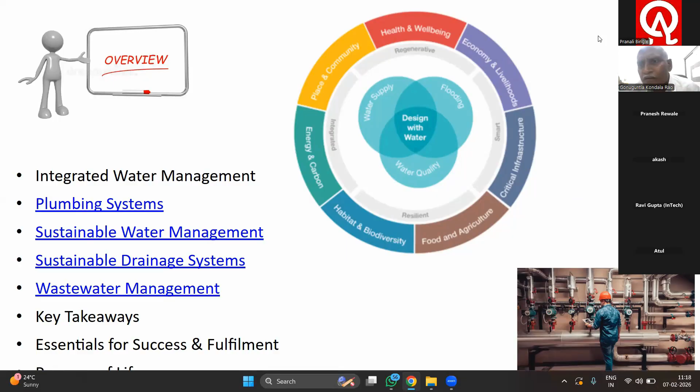Can we close this top panel for a minute - hide it. Madam, can we close this top one, audio, video, participants, etc.? Sorry sir. On the top I am seeing audio, video, participants, chat etc. on the panel - can we close that for a second, at the top?

So you all know regarding the Sustainable Development Goals, which have been developed by the United Nations organization, and which have been accepted in the year 2015 as a continuation of the Millennium Development Goals, which could not be achieved in full. So that is the context.

So the idea is to provide equal opportunities for all, and to have a sustainable planet, and to ensure that poverty, hunger, etc., and inequalities, and access to water and sanitation, and sustainable development, and environmental sustainability, and climate action, and peace and justice, and strong communities, strong institutions, and partnerships for the goals. These are the overall goals. So they are 17 in number. They are supposed to be attained by the year 2030.

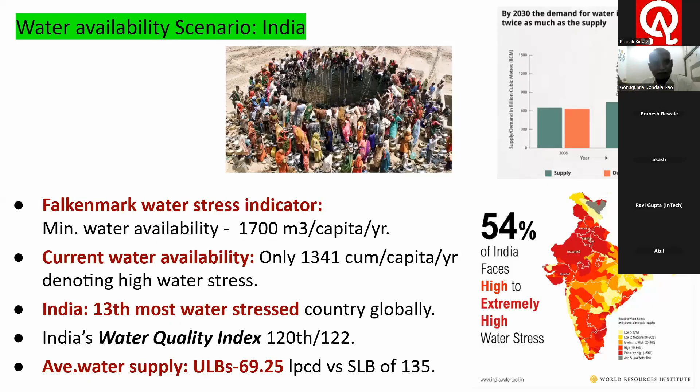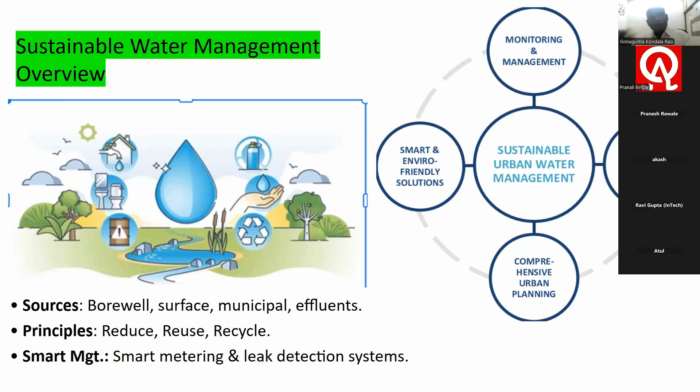So you can see what are the conservation strategies. For example, IGBC, the Indian Green Building Council. For example, in Hyderabad, there is the Sorabji Godrej Green Building. There, you are conserving water, energy, and natural resources, and using natural ventilation and lighting due to sunlight, etc. So in that way, we can make buildings green or positive towards sustainability.

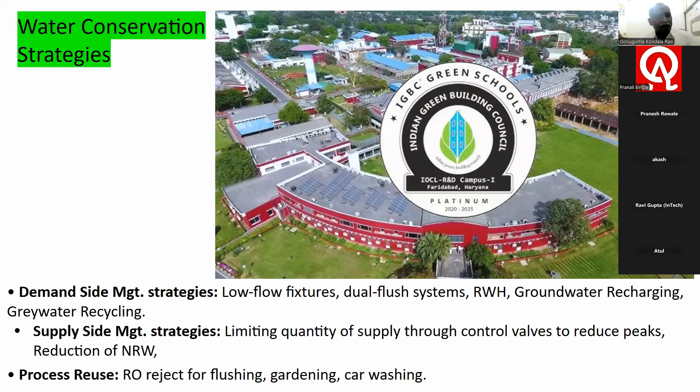So you can have demand management strategies like low flow fixtures or dual flush, groundwater recharging and grey water recycling, and also supply side management strategies like limiting the quantity of supply through control valves in order to reduce the peak flow, and reduction of non-revenue water, which also includes the physical losses. So not only the financial losses, but physical losses also. Process reuse, RO reject water for flushing, gardening, and washing wherever feasible.

So if we see the water loop of Singapore, we have been to Singapore at government expense. I'm thankful to the Government of Andhra Pradesh. What we observed in Singapore is they are importing most of their water requirements from nearby countries like Malaysia and Indonesia, because it is a city state. It is smaller than Hyderabad, and its population is also less than Hyderabad city, that is GHMC, Greater Hyderabad Municipal Corporation. Still, their water management strategies are really worth appreciation.

They are managing the storm water, the rainwater, and also seawater. The storm water is collected in 17 reservoirs. They have made a waterway, so reservoirs are connected. Then the raw water is treated to potable standards. The Public Utilities Board is in charge of the water treatment processes, and that is transmitted to industry and households. The seawater is also treated through desalination and transmitted to industries and households.

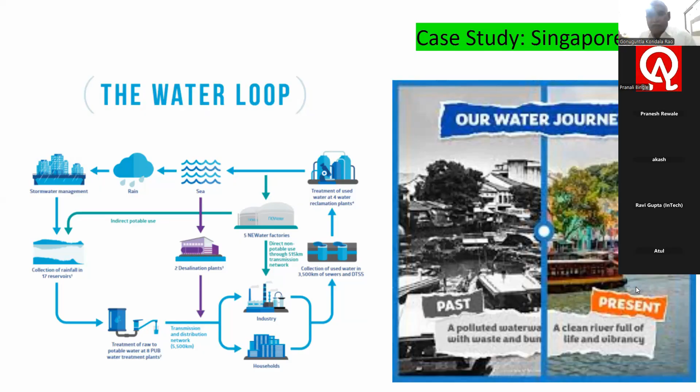In 1977, Lee Kuan Yew, who was the Prime Minister of Singapore, threw a challenge to the engineers and planners: can you clean the Singapore River in 10 years? The officials took up the challenge and cleaned the Singapore River, which earlier was highly polluted, into a pristine pure river. In 10 years, they transformed it into a clean river. We have seen that we can even travel through it by boat, and the water body is very clean, supporting aquatic organisms also.

In Odisha also, another good practice is that they have taken up a scheme called the Drink from Tap mission, and they were successful. They have provided universal access and metering to all households, reduced non-revenue water, and given house service connections. They have also ensured community partnership. As Jal Sathis, they have engaged 5,000 women, paying some nominal amount. They were very helpful in managing the last mile service delivery.

And smart water management, using Internet of Things based systems and sensors, so they can monitor the entire water supply system on a real-time basis through a command and control center. Similarly, they have done infrastructure modernization: water treatment plants, distribution network, GIS mapping, etc. And capacity building also through WATCO, a company they floated, with the Odisha Water Academy, which has helped in enhancing the capacities of the concerned officials.

And public awareness, that is the Pure for Sure campaign. They have also employed a mobile lab on wheels and real-time quality displays. So this is one good practice. They have also built public confidence in the tap water quality. That is what we have to give to the people.

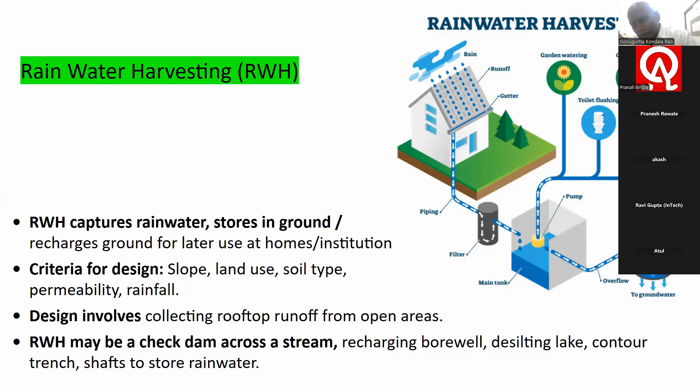And then you can pump it directly for garden watering, etc., or you can pump it to the overhead tank, and from there by gravity you can supply water for toilet flushing, car washing, etc. So this is how it works. The overflow can be taken to the groundwater for groundwater recharge or to a well.

So this is a typical design of a rainwater harvesting structure done by the Hyderabad Metro Water Supply Board. There are different designs depending on the size of the house. This one is more applicable for a smaller house. You will have different layers. About 2.0 meters depth for the rainwater harvesting pit, which will have 40 mm metal at the bottom for about half the depth, then 20 mm metal for about one-fourth of the depth. And on that, there will be coarse sand.

Okay. So the important thing is the operation and maintenance, how you operate it and how you maintain it, because the top layer will be silted up. So you have to remove the silt from time to time. That is the only operation and maintenance needed.

And in order to ensure that the top layer of sand doesn't get disturbed, disturbing the lower ones, you should have some sort of arrangement. The splashing should be arrested. This disturbance should be arrested. So you will have something like concrete at the place where the water falls from the top. Okay. So this is the plan and section.

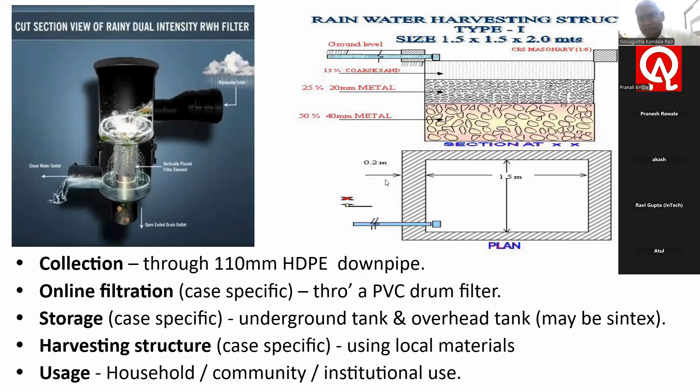So then we come to groundwater recharging. Why is groundwater recharging important? In India, almost 70% of our groundwater is contaminated, and we are facing acute groundwater depletion in most of the areas, even in the Gangetic Plain. That is the unfortunate thing, particularly in Punjab, in urban areas in Punjab, Haryana, Himachal Pradesh, Delhi, Gujarat, etc. Even in Maharashtra, in Karnataka, almost in 70% of the places. That is the gravity of the situation we are in.

So the net reduction in the groundwater table is due to what? Falling rainfall. Over the years, rainfall is falling. Overall rainfall may vary a little this way or that way, but most of the rain which is to fall over a period of about 3 months is falling only in 58 to 62 days. So the number of rainfall days has been coming down over the years, particularly due to climate change, and indiscriminate groundwater extraction, particularly in the Punjab region, etc.

Indiscriminate groundwater extraction. Groundwater recharge is not in consonance with groundwater extraction. Extraction is much more than recharge, which will make the groundwater aquifers completely emptied and not able to cater to the needs. Due to heavily paved roads and spaces, built-up areas, and removal of vegetation, there is no recharge of groundwater, and there is scanty rainfall. All this leads to non-availability or low availability of groundwater, groundwater salinity, unsustainability of the groundwater aquifers, and soil infertility also results.

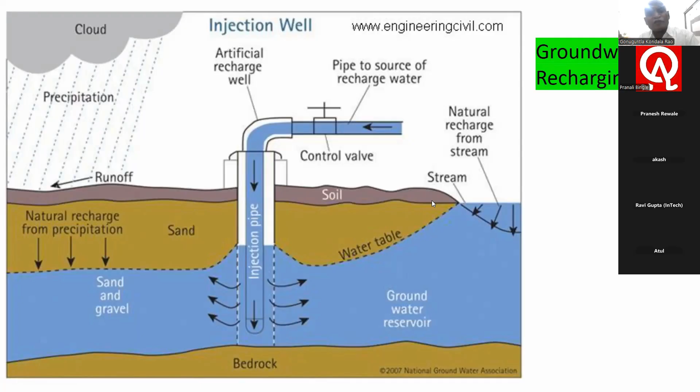So this is how you recharge the groundwater. From the natural source of recharge water, that may be rainfall, a normal rainwater harvesting structure or any other source, you have to pump the water into the ground, into the borewell, through an injection pipe, and it will recharge the groundwater table and the borewell. So this is how it works. This is also a very good option to rejuvenate a dried up well.

So grey water composition. We have discussed rainwater harvesting and groundwater recharging. Now we come to grey water composition. What is the extent of grey water? Almost 62% of the used water is grey water. So what is grey water? It consists of kitchen wastewater, from washing utensils and sinks, the bathroom sinks, the bath water, and the laundry water. All these three components constitute our grey water.

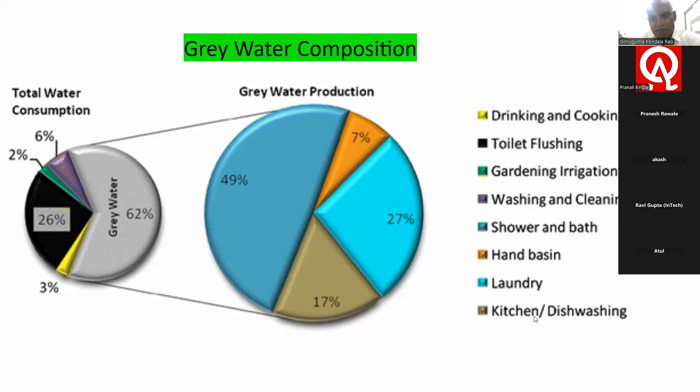Out of the 62% of grey water, about 49%, almost half, we are using for shower and bath. Then wash basins, hand basins, 7%, and laundry, 27%, kitchen, dishwashing. So this is the context in which we will discuss the next thing.

So grey water recycling. The water which is coming from the overhead tank or directly is being consumed by the kitchen, the water purifier, the bathroom and the laundry. This is all what we call grey water, or sullage. All that is collected in a collection chamber. Then it is filtered and treated, preferably through constructed wetlands, because these are nature-based solutions.

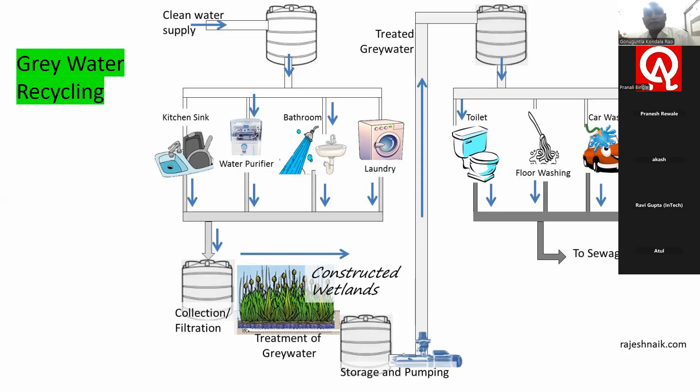After treatment, it is stored and pumped to a separate overhead reservoir, not the regular water tank, and it is supplied by gravity to the toilets for flushing, floor washing, car washing and gardening. There are standards for that also. It's not that it is directly used; we may sometimes need to disinfect it through UV treatment or whatever is feasible.

So these are the standards for grey water. These are the characteristics of grey water. This is the grey water, this is the raw sewage. It's much better than raw sewage, but it still needs some sort of treatment at the domestic level as well as at the industry level or in water treatment.

We went to the Raghavapur water treatment plant under the Mission Bhagiratha scheme for an inspection, in Telangana, near Hyderabad, Parigi Mandal. There is a water treatment plant there, and what they have planned is recycling of the clariflocculator sludge. In that way, they are trying to recycle the clariflocculator sludge water, which is separately collected.

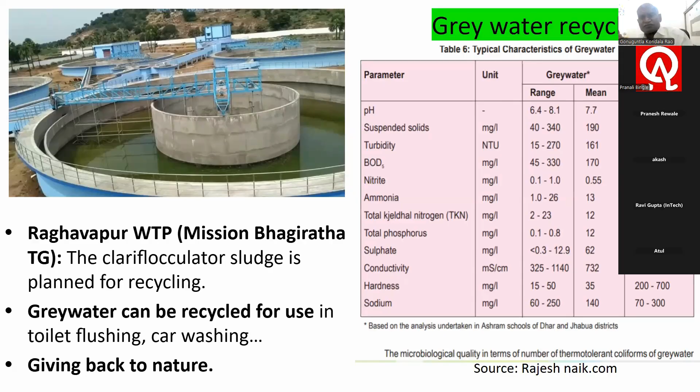So grey water can also be recycled for use in toilet flushing, as we have discussed. What we are doing here is actually giving back to nature. We are giving it back to nature. That is what we have to understand. So another aspect, a little bit more technical. This is the International Water Association.

This is the water audit. This is water balance study. How do you make a water balance study? What is water balance study? What is going into the system? What is coming out of the system? Is it equal, or is there any gap between the water that is flowing into the system and which is coming out of the system? So that is water balance.

So we'll see system input volume. So what is the input volume that is being input into the water supply system? Out of that, there are two components. One is the authorized consumption. The second is the water losses. Authorized consumption is you are authorizing it. It's an authentic consumption. Out of that, there is billed authorized consumption and unbilled authorized consumption. With billed authorized consumption, you are getting money. Unbilled authorized consumption, you are not getting money. In the water losses also, you are not getting any money.

Apparent losses and real losses. Apparent losses means unauthorized consumption and customer metering inaccuracies. Similarly, billed authorized consumption consists of billed metered consumption and billed unmetered consumption. So there may not be a meter, but still it will be billed. That's why it is a revenue one. You are getting money for that. But unbilled authorized consumption does not give you any money. Unbilled metered consumption, unmetered consumption also. Even if it is metered consumption, if you don't bill it, then you don't get any money for that, isn't it?

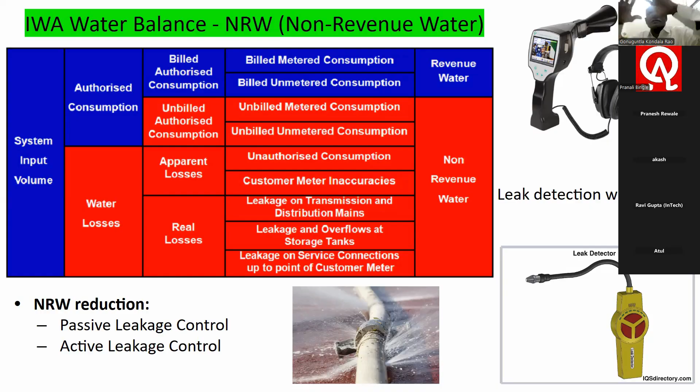Whereas active leakage control is you will investigate. You can use leak detection cameras, leak detectors, leak noise correlators, like that. Some leak detection equipment is there. Through them you will identify leaks, and you will have a detailed plan of action. It needs consultants, a lot of capacity building, and technology and equipment also. So that is a little bit more difficult. That's why at least we should aim at passive leakage control. Whatever is apparent, whatever is visible, you have to first take up the control of that type of leakage.

So life is after all a celebration, my dear friends. So let's take a 1 minute break. I will sing one song, a small song.

सारे जहां से अच्छा हिंदुस्ता हमारा हमारा, सारे जहां से अच्छा हम बुलबुले हैं इसकी, ये गुलसिता हमारा हमारा, सारे जहां से अच्छा हिंदुस्ता हमारा हमारा, सारे जहां से अच्छा.

So our country, we are proud of our country, and we value its rich heritage, and also its water bodies, its resources, its rivers, its canals, its valleys, and its forests, etc. So are we managing them in a responsible way? That is the question we have to ask.

Are we ensuring environmental sustainability, environmental protection, forest protection, river water conservation, and river cleaning up? And are we taking the responsibility? Are we taking the stewardship of water quality and water quantity, water quality protection and water bodies protection? That is the question. Only then can we say our country is great. Sare jahan se acha, we become top in the world.

Oh, 1 minute, 1 minute. One minute. Please wait. One minute. Please wait. Yeah. Sorry for the interruption. So, am I visible? Am I audible? Yes. Am I audible? Yes.

Sorry for the interruption. So, all these parameters are captured by the RTUs and sent to the command and control room where there is a human machine interface. That means human beings will be there and computers will be there. And on the computer, real-time monitoring will be done regarding the water levels, the pressures, etc. Suppose there is a pressure fall at some point of the transmission lines. There we can identify that there may be a leakage at that point, so we can send our linemen and get it repaired immediately.

So that is advanced. Suppose there is an overflow in the reservoir; based on the water level in the reservoir, we can identify whether there is an overflow or not. If there is an overflow, we can immediately give a message to the concerned operator to stop it. And even from the command and control center also, we can control that. So the overflows can be controlled, the leakages can be controlled, and pressure losses can also be controlled.

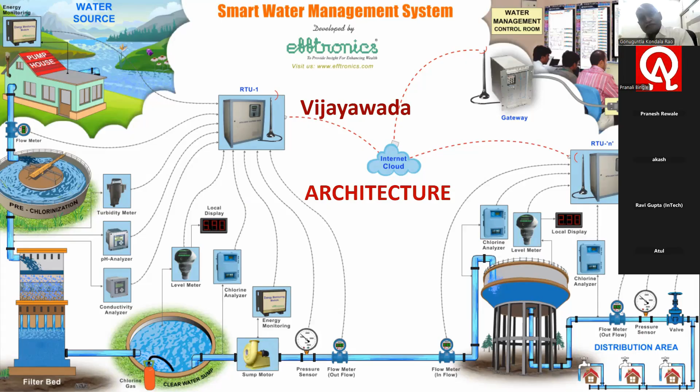So that means real-time, continuous monitoring will help in managing the water supply in a much better way, and even in controlling water pollution and water losses, etc. Okay. And even in emergencies, the SCADA system has helped a lot. You can divert the water supply from one system to another by giving certain interconnections, just for a buffer, for a backup. So that is also the advantage. In the flood in September 2024, it was very useful in diverting water to where water supply had failed. So that is the advantage of this SCADA system.

So there are three circles in Vijayawada. Actually, the MLAs, the members of legislative assemblies, have been demanding, saying our area is not getting water. So we could counter them: no, we have supplied you sufficient quantity of water. This is borne out by the data with us. So then they can be satisfied like that.

So in Tirupati also there is smart water management. That is a little bit different type. There was one 1100 PSC pipeline which was leaking heavily, so the original proposal was to replace the entire pipeline. But later, one IAS officer by name Giridhar was instrumental in engaging the services of one expert from the US. He's an Indian expert, and they devised a software, KY pipe software, for complete continuous monitoring of the pressure levels in the pipelines.

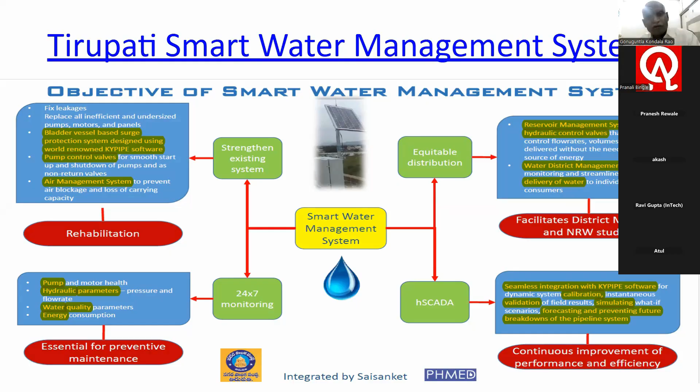These are the various diseases caused by contaminated drinking water, due to organisms like diarrhea, cholera, dysentery, typhoid, polio, and hepatitis A. These are the major diseases, apart from minor diseases.

So what do the Indian standards manuals say? For example, we have the Bureau of Indian Standards, IS 10500, which covers water quality parameters - physical, chemical, bacteriological, and virological.

Similarly, IS 2065 covers building water supply standards, and IS 1742 covers building drainage standards. We also have the National Building Code, revised in 2016, where Part 9 talks about plumbing, water supply, drainage systems, etc. Similarly, we have CPHEEO, the Central Public Health and Environmental Engineering Organization.

There is a water supply manual, and also another manual - the water supply O&M manual, the operation and maintenance manual. You also have the CPHEEO drainage and sewerage manual, published in 2013. And you have the CPCB, the Central Pollution Control Board, and the Ministry of Environment, Forest and Climate Change, with water supply norms and pollution norms.

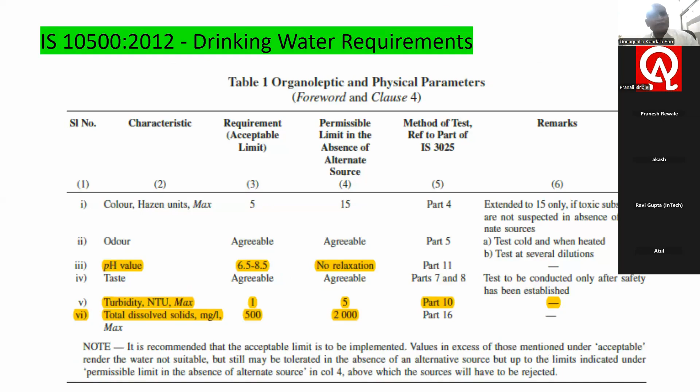So you have a lot of standards, and they are being continuously updated and revised. For instance, IS 10500 covers organoleptic and physical parameters, chemical parameters, and bacteriological and virological parameters.

What are the major pollutants to be measured in water supply, particularly wastewater? There's the oxygen demand - BOD, the biochemical oxygen demand, which indicates the extent of organic pollution in the water. Similarly, COD, the chemical oxygen demand, also indicates organic and inorganic pollution in the wastewater.

Then there are nutrients, particularly nitrogen and phosphorus, because they lead to eutrophication of lakes, etc. We also have indicator organisms like bacteria - fecal coliforms, fecal specific, and Escherichia coli - which indicate the extent of fecal pollution, meaning excreta-related pollution. These are specific to humans.

Solids content, total suspended solids, is also monitored. Nowadays, forever chemicals, persistent organic chemicals, pesticides, insecticides, and their residues are also areas of concern - the PFAS, per- and polyfluoroalkyl substances, which are being monitored in the United States by the EPA. We don't have standards regarding that yet; we have to develop them.

This is surface runoff, showing how pollution happens from domestic wastewater, industrial wastewater, and agricultural wastewater. All these wastewaters contribute to water pollution.

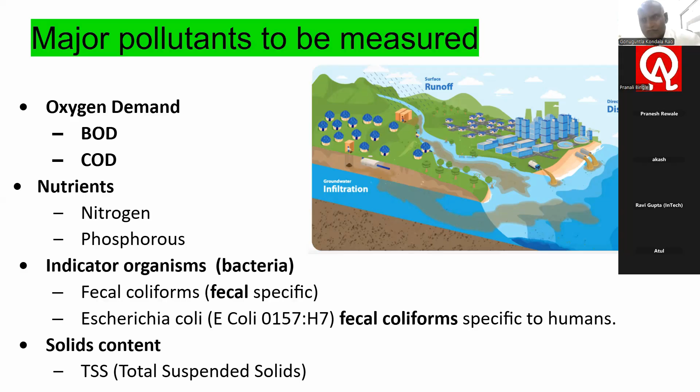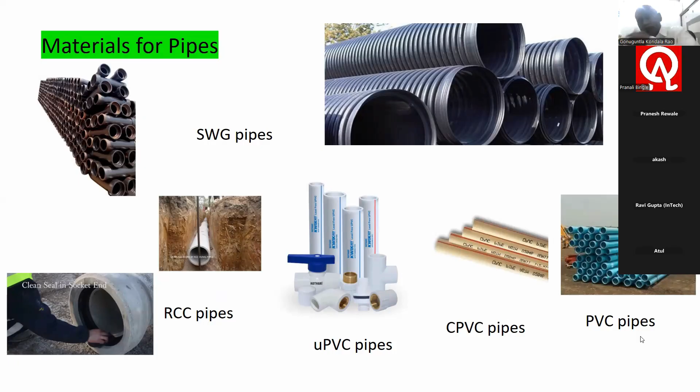These are the pipe materials. These are DWC pipes, also HDPE pipes - double wall corrugated pipes - and these are SWG pipes, stoneware glazed pipes. Similarly, RCC pipes, UPVC pipes, CPVC pipes - particularly used for internal water supply. UPVC pipes are also used for water supply pipelines, while PVC pipes are normally used outside.

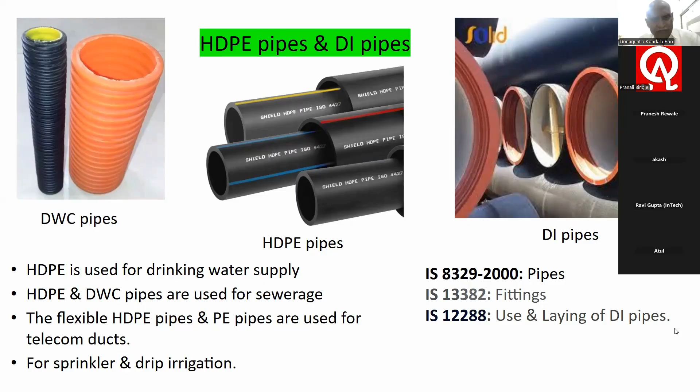HDPE pipes are a good material which we used in our APUSP, the Andhra Pradesh Urban Services for the Poor, a DFID British government aided project, along with DI pipes. These are mostly used for water supply and even sewerage systems - double wall corrugated pipes, HDPE pipes, and DI pipes. We have different codes for each of these.

So plumbing systems. How do you design for plumbing systems?

Nowadays, due to water scarcity, we have to go for extensive saving and conservation of water. You can have water efficient washing machines, like front loading washing machines, which conserve a lot of water. For showers, you can have low flow shower heads, saving easily 30% of water. Similarly, for taps, you can have quarter turn or half turn taps with flow restrictors, saving almost 50% of water.

Similarly, you can have adapters fixed to the taps, saving easily about 50% of water. By using a simple mug instead of flowing water from an open tap, you can save more than 60 to 70% of water. So there are two types of plumbing systems: direct water supply system and indirect water supply system.

What is the difference? In a direct water supply system, you directly pump water. If the pressure is adequate, it will be directly pumped. If the pressure is not adequate, you put a pump and an overhead tank, and through the overhead tank, by gravity, you supply to the various installations, equipment or appliances. So you can have direct, overhead, or pressurized systems.

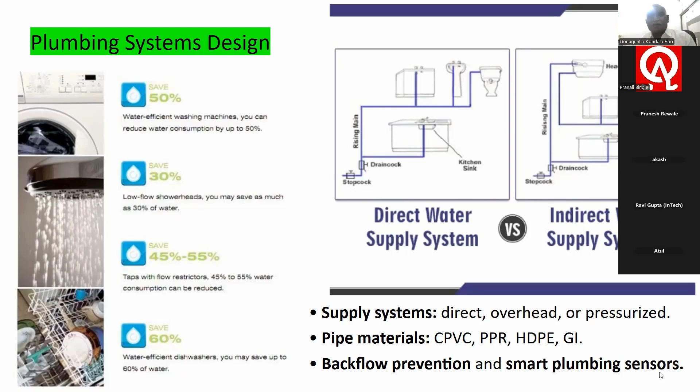You can have different types of materials for pumps and pipes, and backflow prevention and smart plumbing sensors are important. You have to prevent backflow, siphonage, etc., so that there is no contamination of water.

So fixture traps - there are different types of fixture traps. What is the use of these fixture traps? They prevent the mosquito menace, cockroaches, and gases. They also prevent germ entry and sewer gas, etc.

You have to provide air circulation for the drainage system to function properly, so foul air exhaust is also important for the vent terminal. All vent pipes should be provided with a cowl on top, so that there is no entry of mosquitoes, etc. In the diagram, you can see the water seal.

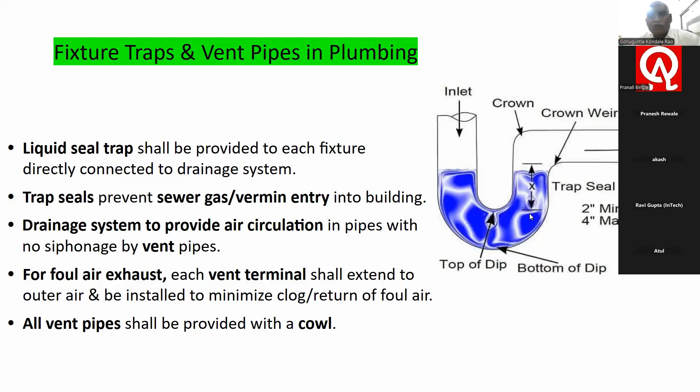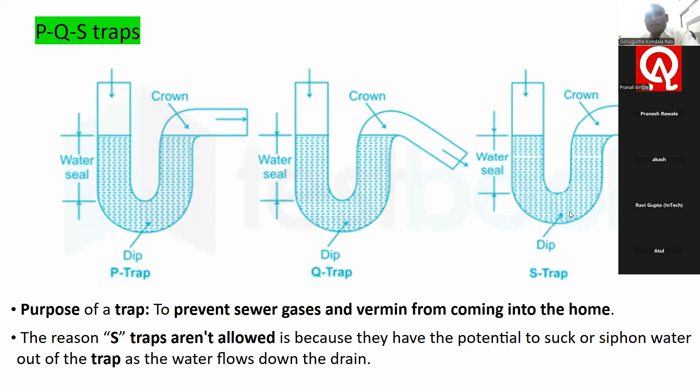This is what is known as the trap seal or water seal. It should be about 2 inches, up to 2 to 4 inches maximum. These are the different types of traps: P, Q, S traps. P traps are used mostly for wall fixing, and Q traps for floor fixing. S trap is not generally advisable because it leads to back siphonage.

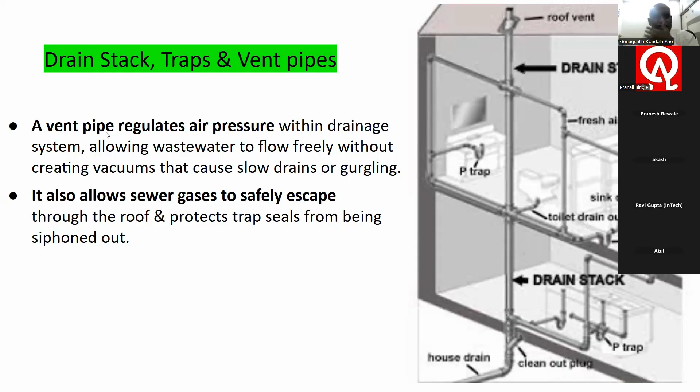And fresh air inlet - it enables fresh air inlets. For clean out, there's a first covering, which is connected to the house drain. What does the vent pipe do? It regulates the air pressure within the drainage system, and it also allows sewer gases to escape.

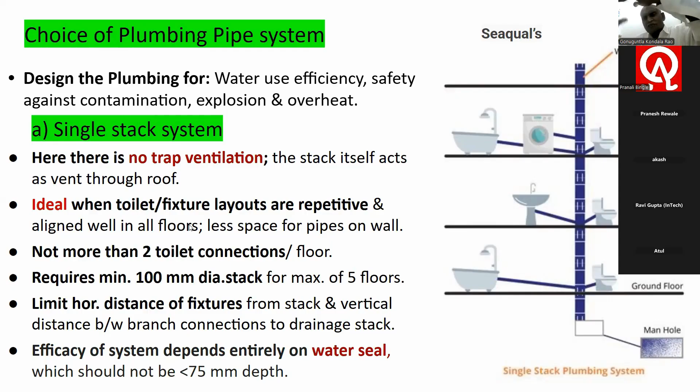How do you identify the choices for the plumbing pipe system? One is the single stack system, which is the cheapest and simplest, with no vent pipe. There is a single waste and soil pipe, and no trap ventilation. It is ideal when the toilet or fixture layouts are repetitive, meaning at the same location on different floors.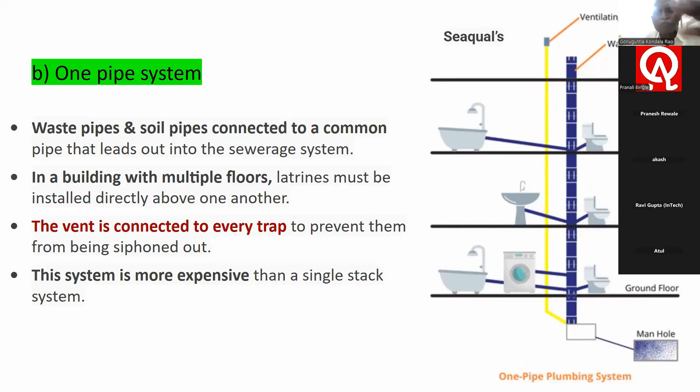This is another system, the one pipe system, where there is a ventilating pipe. All traps are connected to the stack pipe - the waste and soil stack pipe - and ventilation is done through the ventilating pipe. The vent is connected to every trap to prevent them from being siphoned out. This is a little more expensive than the single stack system.

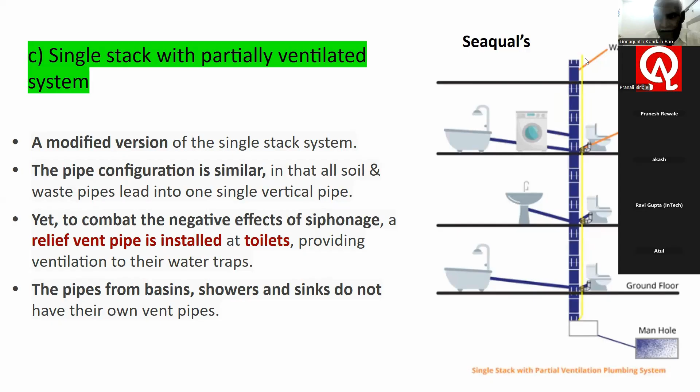This is another system, the single stack with partially ventilated system, where generally a relief vent pipe is installed. These are the relief vents. This is how air outlet happens from the vent pipe, so that gases and vermin are prevented. Another pipe system is also there.

The two pipe system - here there are two pipes, a soil pipe and a waste pipe. The soil pipe is for excreta, and the waste pipe is for other wastewater. Each pipe is connected to different ventilating pipes.

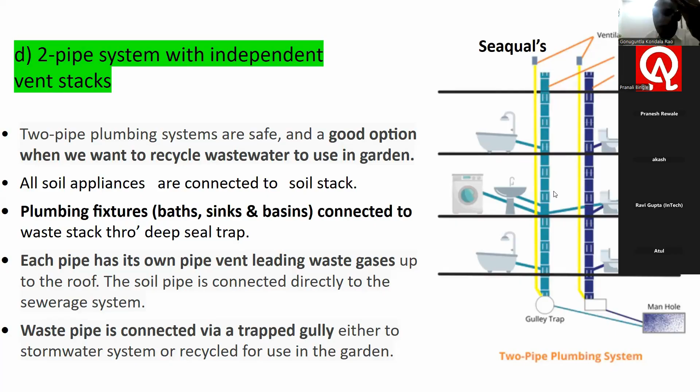This is more costly, so all the plumbing fixtures will be connected to the waste stack through a deep seal trap. That is a water seal, so that it prevents gases and back siphonage. This is a two pipe system with a common vent stack, soil pipe and waste pipe, and a common vent. So this is how it works. All the soil appliances will be connected to the soil stack.

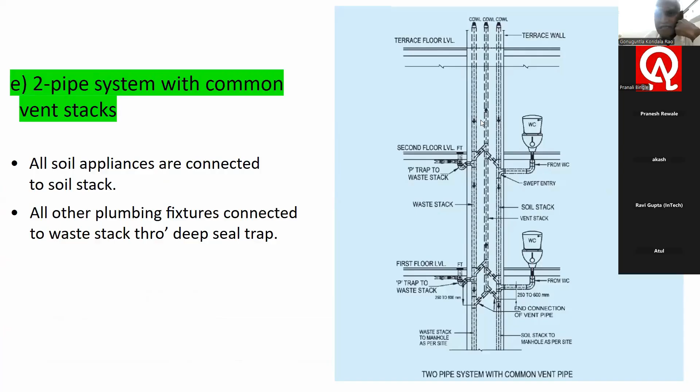So friends, any questions, please? Any questions? Okay, if there is no question, life is after all a celebration.

We will celebrate with a song. This is one song from the film Madhumati, which is a very old song, where the main man, the hero, sings a song.

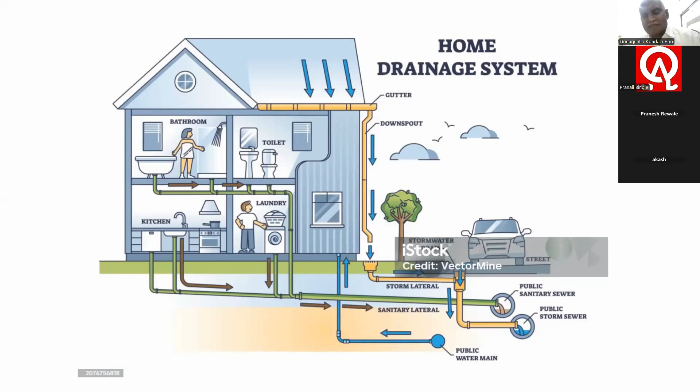So this is the water main, of course, and this is the stormwater lateral. There is a separate stormwater system. In India, because rainfall is concentrated within 3 months, and that too within about 70 days, or less, we cannot go for a combined sewer system. Our system is a separate sewer system because of the seasonal rainfall, unlike European countries.

So how do you manage stormwater? Are we using stormwater in a responsible, environment friendly way? This is the question. So we are going for hard infrastructure, that is grey infrastructure, but is it producing results?

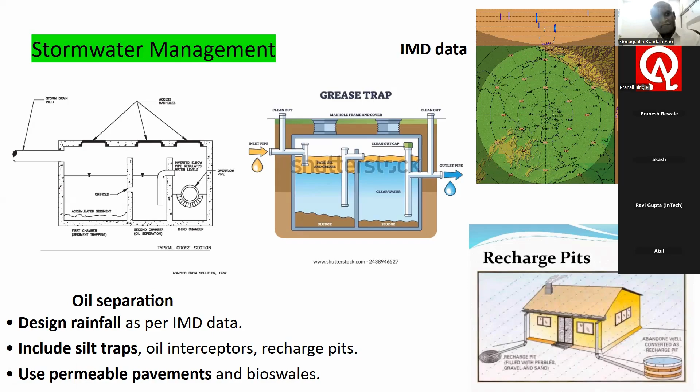And by using permeable pavements and bioswales, that means plant-based swales, that is kacha drains also, you can enable infiltration of the stormwater or runoff into the ground, so that you can reduce the stormwater runoff over the ground. So these are the options for sustainable urban drainage system.

Different people call it differently. For example, water sensitive urban design. Similarly, blue-green infrastructure, low impact development. Like that, different people or different countries are calling it in different ways, but almost all are overlapping.

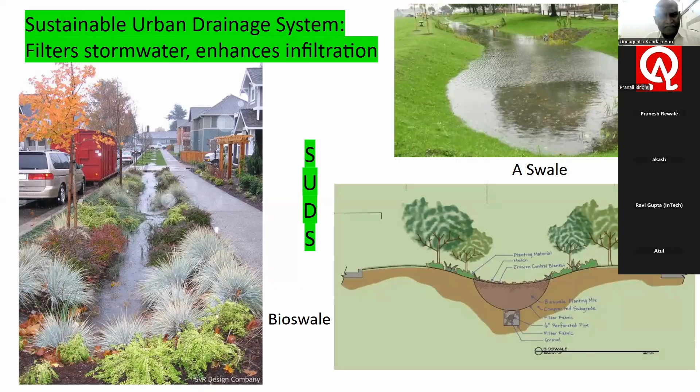So this is one bioswale. So this is one swale. Here there is vegetation. Here there is no vegetation. So there are green gardens. There is a specific design pattern. Nowadays, even GHMC has called a tender where they have specified blue-green infrastructure or water sensitive urban design in their tender for developing this stormwater drainage study.

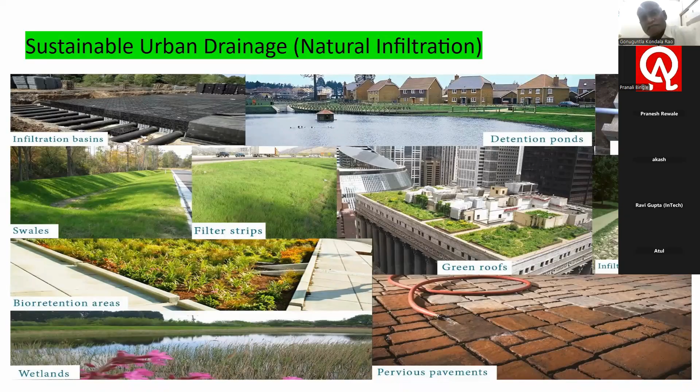So these are different types of blue-green infrastructure or sustainable urban drainage. They are also called nature-based solutions. They enable natural infiltration into the ground. So this is the green stormwater infrastructure, which we have already discussed. This is the conventional sewerage. This is hard infrastructure. This is green and blue infrastructure.

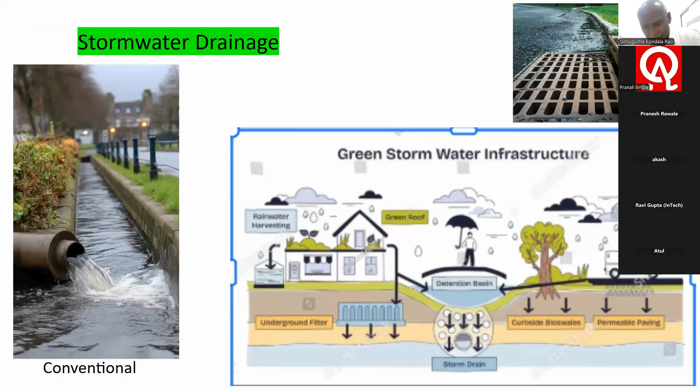Detention basins. Retention basin means it retains water. Detention basin means it retains water for some time only, then it will be let off or pumped. So you reduce the peak flow in that way. This is the curbside bioswales, permeable pavements. In Hyderabad also, in one sports stadium, Cardigan Stadium, they have built pervious pavements.

Wastewater management. Wastewater is the used water. That is grey water, or sewage water, the toilet water, that is black water. Both grey water and black water constitute the sewage or wastewater. This is the industrial wastewater, and segregate the domestic and industrial wastewater.

Generally, in our wastewater treatment, we segregate the industrial wastewater. We don't mix the industrial wastewater and the domestic wastewater. We have separate industrial wastewater treatment plants, either for an individual industry, if it is a big one, or CETP, that is common effluent treatment plants for a group of industries, so that the costs come down and their bottom lines can be sustained.

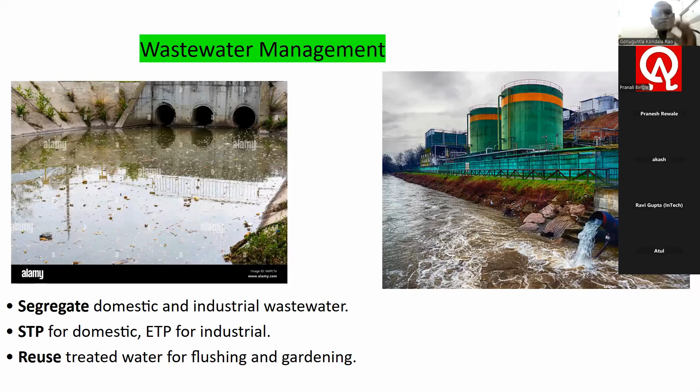Then STP, sewage treatment plant for domestic wastewater, ETP, effluent treatment plant for industrial, and reuse also. Even for domestic wastewater treatment systems, STPs, we can reuse the wastewater for different purposes, or recycle it for industries, agriculture, or horticulture. That's how we ensure circularity. That means we don't waste anything at any stage. That's the circularity principle.

Typical domestic septic tank system. This is the septic tank cross section: the solids, that is the sludge, the liquid sewage, and the scum, which consists of fats, etc., which collect at the top. There will be an inlet obstruction and an outlet obstruction also, so that there is no short circuiting.

You could call them barriers. Household wastewater, both grey and black water, will flow into the septic tank, and it will be collected in a distribution box, and from there it is distributed in the drain field trenches. They are shallow trenches, about 1.5 to 2 feet depth, with perforations. They may be PVC pipes or stoneware glazed pipes.

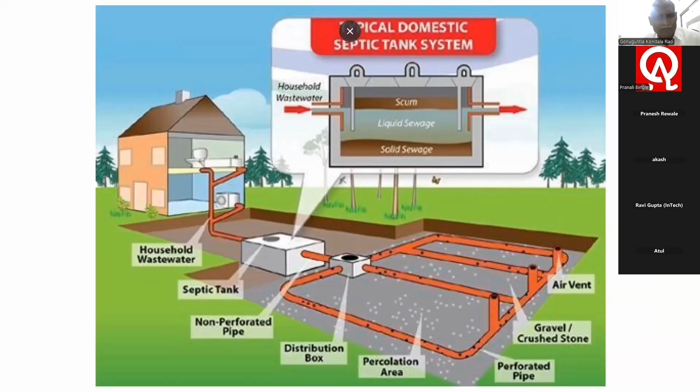And here nitrification also happens. So the effluent from the septic tank is only partially treated. It's only primary treatment. The secondary treatment will be done through this one. You can also have a leach pit. So this is the regular systematic wastewater treatment.

This is the wastewater treatment plant layout, where initially the sewage from the houses will be collected through a sewerage pipe network, and there will be coarse screens and fine screens, and then the grit and waste material will be disposed separately. After the coarse screening and fine screening, it will go to the primary sedimentation tank. The sludge which is collected will go to the sludge processing units, and the effluent of the primary sedimentation tank or primary clarifier will go to the aeration tank.

This is the main bioreactor. From there, after digestion, the mixed liquor will go to the final settling tanks. A portion of the mixed liquor, or recirculated sludge, will go to the aeration tank, so that it will improve the efficiency of the bioreactor. The excess sludge will also be taken to the sludge processing units. After the final settling tanks, the effluent will be taken as recycled wastewater class B and C. That's a little bit lower quality.

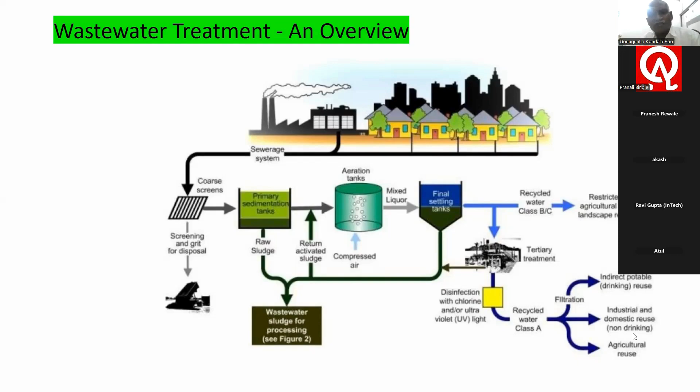Some of the portion will be subjected to tertiary treatment, and then it will be disinfected, and it is called recycled wastewater class A. That can be used for indirect potable drinking water use, and downstream it will be treated. It can also be used for industrial and domestic reuse, but not for drinking unless it is highly purified using RO process, etc. It can also be used for agricultural reuse. So this is a bird's eye view of how the wastewater treatment system works.

In GVMC, there is wastewater recycling. Out of 108 MLD of wastewater produced, they are treating almost 70 MLD, and from the Narava STP they are selling the treated wastewater to Hindustan Petroleum Corporation Limited and the Vizag Steel Plant, and they are using 7 MLD for gardening in a club, and 5 MLD for the port trust. So they are getting money, maybe about 40 crores or so per annum.

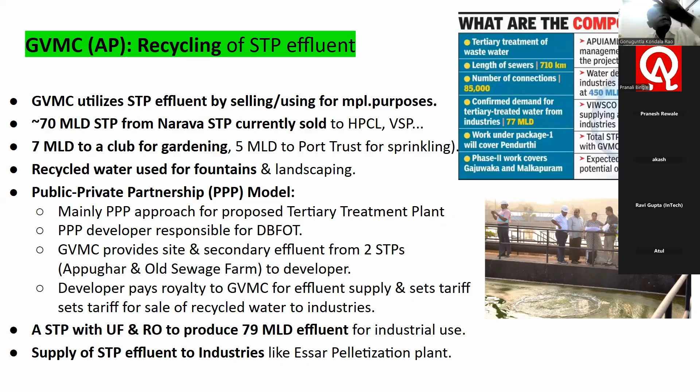There is a PPP model, the public-private partnership model, with the municipality and a private sector organization. There is a special purpose vehicle also created for that, and APUIAML, a project management consultant, is the consultant. So this is a very good practice. In Nagpur also they are doing similarly. They are also getting quite a good amount by recycling the treated effluent of the wastewater treatment plant to the thermal power station. So there are good practices.

So far we have discussed what is relevant regarding wastewater treatment, stormwater drainage, and water supply. Then what is the way forward? What can we do as individuals, as responsible citizens and responsible officials, whether private sector or public sector? What is the vision? Universal coverage: to cover water supply and wastewater infrastructure with universal connections for every person, every household, and we also have to ensure quality.

What other things can we do? We can integrate conservation, plumbing, and reuse and recycling of wastewater. One is rainwater harvesting, collecting rainwater, and groundwater recharging. Thereby we can raise the groundwater table and make it available for farmers and also for others like us. Then grey water recycling: we can recycle sewage water by properly filtering it, according to standards and bylaws. We have to frame municipal bylaws and industry bylaws. Without bylaws, we cannot make it successful.

Non-revenue water reduction, particularly for municipal supplies, and even in industrial townships you can have non-revenue water reduction strategies, whether passive or active leakage control, using technology, metering, etc. And adopt smart monitoring, like a SCADA system, and water audits and water balance studies. Mentor children and youth for water safety and security. So now what we are doing.

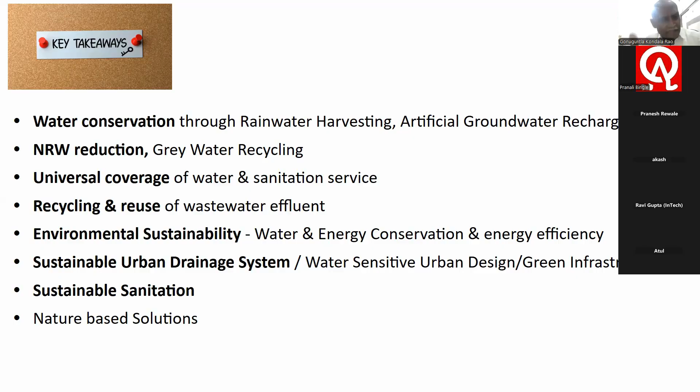Instead of going for regular drains only, we can combine it with these sustainable urban drainage systems, as we have discussed. Sustainable sanitation options. You can use nature-based solutions also, like constructed wetlands. Okay, nature-based solutions like your algae-based solutions, constructed wetlands, the KMS SBTC technology, soil biotechnology, like that.

So I salute all the great people, our own governments, both central government and state governments, the CPHEEO organizations, Central Pollution Control Board, CPHEEO, BIS standards, and all people who have contributed to mankind, humanity, by way of the water and wastewater sector. And just only 2 slides regarding the essentials for success and fulfillment for the youth and the

children and for others. See, life is not only for enjoying, only for food and eating, etc. Life is for contribution to our fellow beings. So we have to acquire knowledge and skills. Knowledge without skill cannot be actionable. So we should have knowledge and we should have skill, and we should also have the attitude to do the work. We are anyway getting salary. What should we do? This is one attitude.

But having knowledge and having skill, if we want to contribute, we should have the right attitude that we have to contribute to the nation. We have to contribute to humanity, to our society, community. Similarly, we should have dedication and health. That's why Shariramadyam Khalu Dharma Sadhanam. That means unless you keep up your good health, you can't contribute to the society.